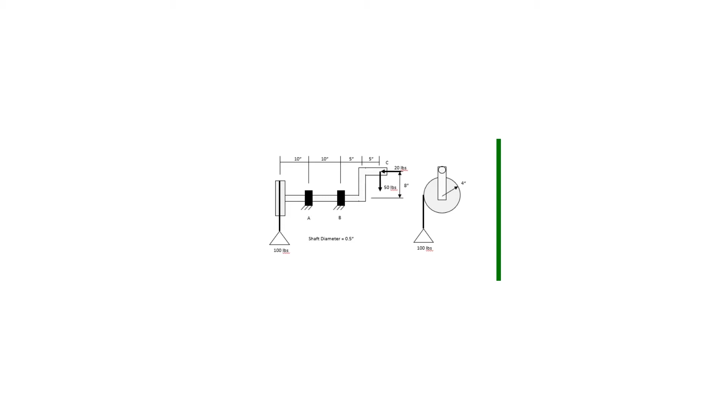Bearings can carry radial loads, and so these bearings will fix the displacement of the shaft in the transverse or radial direction. Bearing B will also carry an axial load. The focus of this model is to determine stresses and deflections in the shaft. We are not concerned with the end disc. Therefore, we can model the hand crank as a single continuous beam as shown.

Here's the handle, the lever arm down to the main crankshaft, and then out to the applied load. This simplifies the geometry because beam elements can be used to model the whole system instead of needing to couple beam and shell elements or beam and solid elements together.

The boundary conditions are also as shown, where this radial bearing will provide zero displacement in the X, Y, and Z directions, as does this radial thrust bearing. The end handle will be fixed in the Z direction to counteract the transverse load that's applied here at the end of the shaft. I hope you enjoy the tutorial.

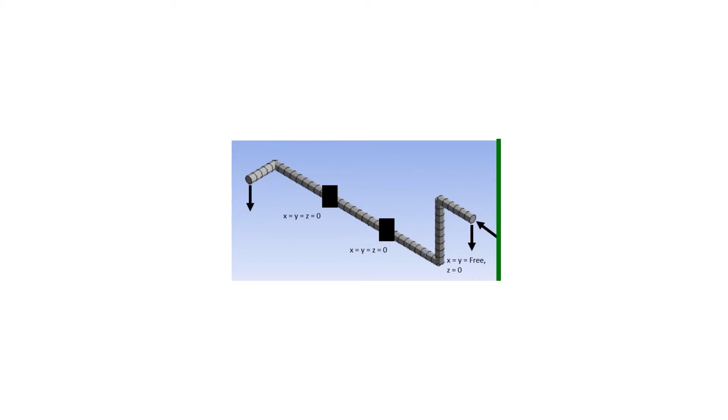After opening SpaceClaim, the first thing I'll do is change the units. The default is metric, and I want to use English units in this model. So I'll left-click File, click SpaceClaim Options, click on Units. I'll leave it as this document only, and I'll change the type from metric to imperial.

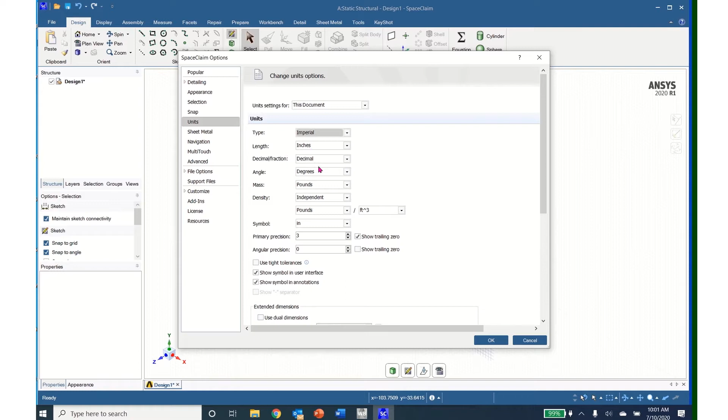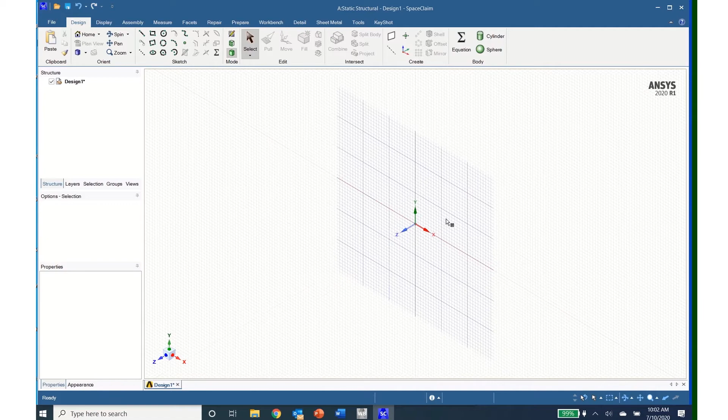Inches is the default. I'll scroll to the bottom and I'll change the minor grid spacing from 1/8 of an inch to 0.1, and the number of grid lines per major I'll change from 8 to 10, and then click OK. I then right click and left click on Select New Sketch Plane and highlight the XY plane and click Plan View. I'm now ready to begin to draw my structure.

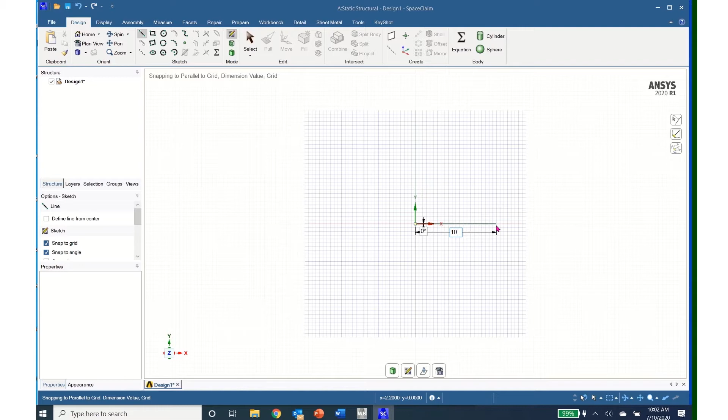I will start at the origin and build the structure to the right. So I'll come up and click on the line tool, click on the origin and release, and move my line over, and this first line will be 10 inches. So enter 10. Then I can, without clicking, move my line over and enter in another 10-inch line. And now I enter in a 5-inch line.

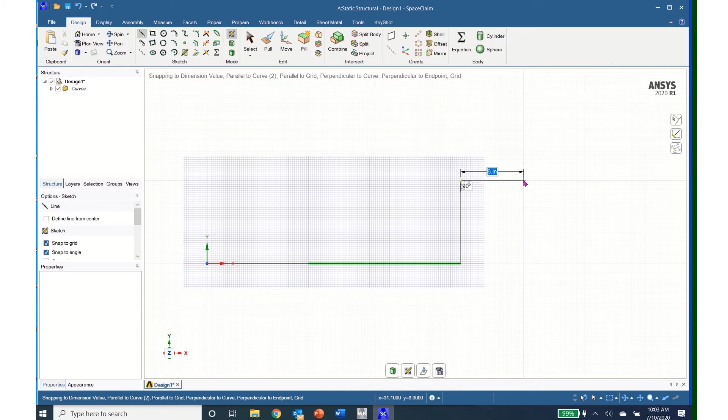And now going in the vertical direction, I will enter in an 8-inch line. And then I can hit my Control key and my middle mouse button and drag my structure over more to the center, release that, move my line over and type in a 5-inch line there. I now have the major part of my shaft designed, and I can now continue by entering in the line for the circular disc.

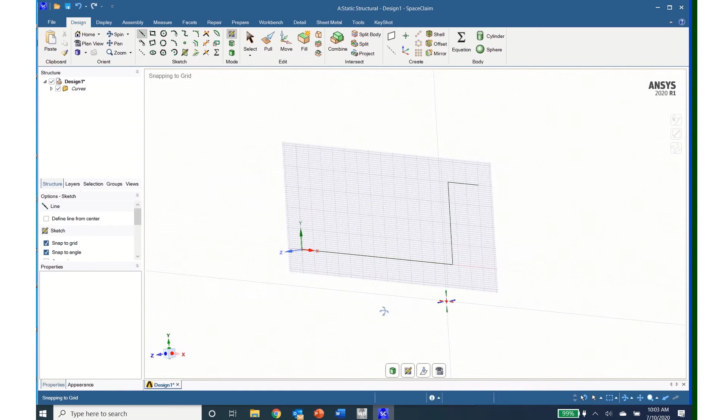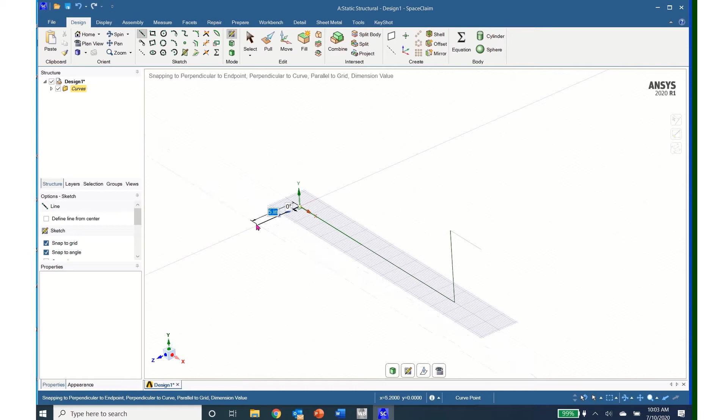So I will middle mouse button and rotate my structure. Now I can right click and select New Sketch Plane, and I'll select the XZ plane as shown. Now I can rotate this and come up to my line tool and click on my line tool, go to my origin again, and I will drag this line out and type in 4 inches.

I am now ready to create my cross sections, so I can escape out of this by clicking twice on escape. Then I come up to prepare, then profiles, click on my circular profile, and I can see that it has generated beam profiles over here. I open that tree, come over to circle and right click on circle, then left click edit beam profile.

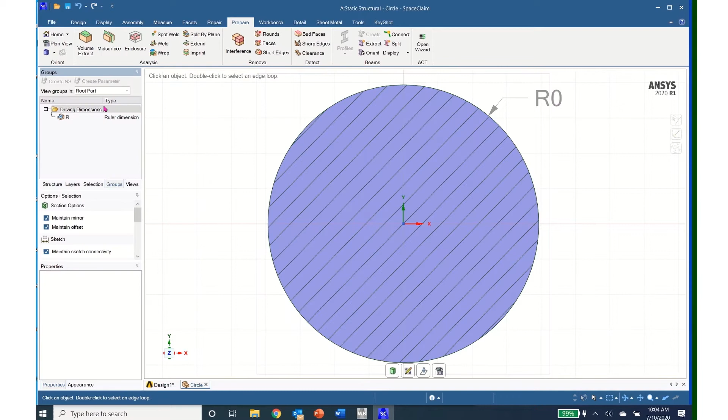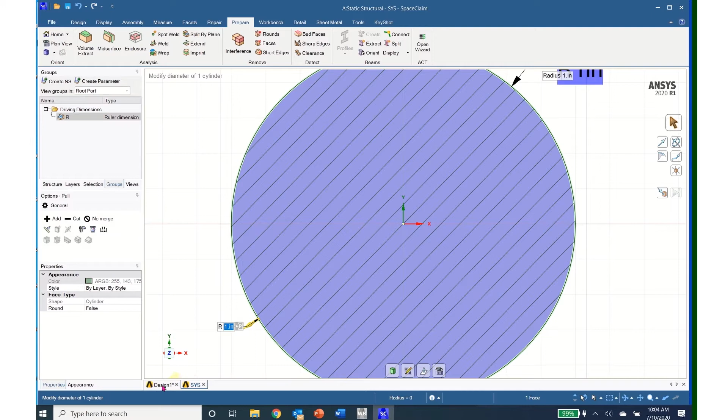Then I click on ruler dimension, and I can click on the 0 and type in 0.5 inches, which is the radius of the shaft. So I'll type in 0.5, enter. Now I come down and I click on the Design 1 tab on the bottom to take me back to my beams, and I click on the structure tree.

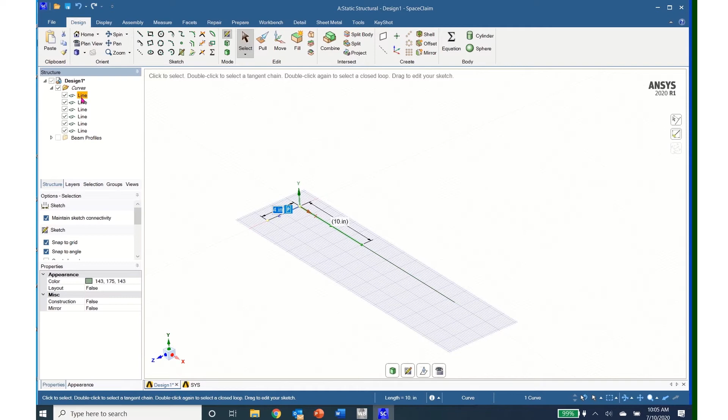Then I come up to curves and I click on design, and then I come over to select and I click on the top line, shift click the bottom line, then I come back to prepare and then click on create, and I have now created those beams, and the lines have changed to beams. I can come over here to display and click the drop down and click on solid beams, and I can see the solid beams, and I can rotate that around.

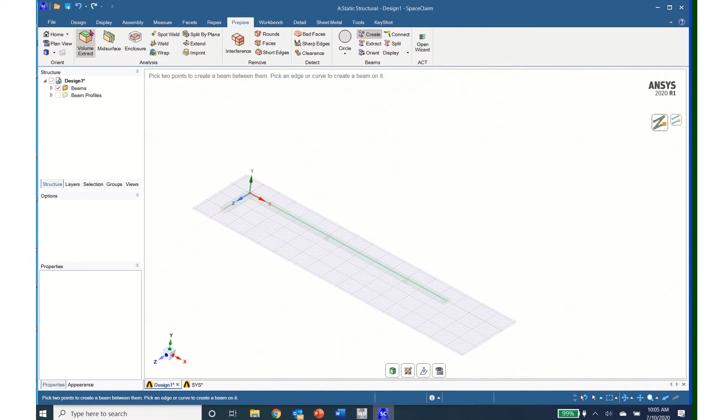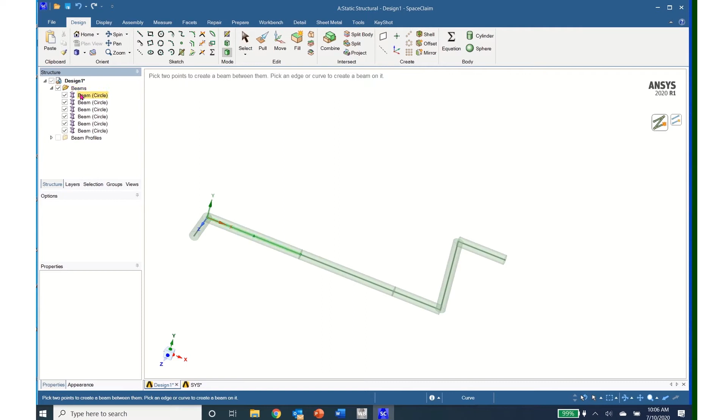If I want to see the full solid structure, I click on design and then 3D mode, and I can see all of my beams and their connections. I now need to tell ANSYS Mechanical that these beams will be connected to each other. To do that, I come up to beams and I will click on the first beam, and to do this I will need to first click on select.

So then I hit select, I'll click on the first beam and then shift click the bottom beam, right click, and then I'll click on move to new component. I can type a new component name in. I'll type in beam, enter. Then I click on that component and I come down to the properties and I change the share topology from none to merge, and that will merge all of these beams together.

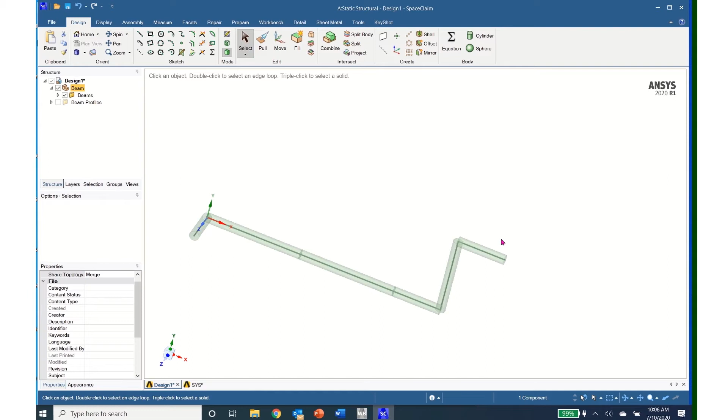I've now created my structure in SpaceClaim. I'm ready to minimize this window and open ANSYS Mechanical. After opening Mechanical, it's a little bit hard to see your structure sometimes. So what I'll do is come over to the structure tree and open up geometry and click on the geometry, and it turns color and makes it easier to see. I can see that my geometry has been brought in as one beam with a circular cross section.

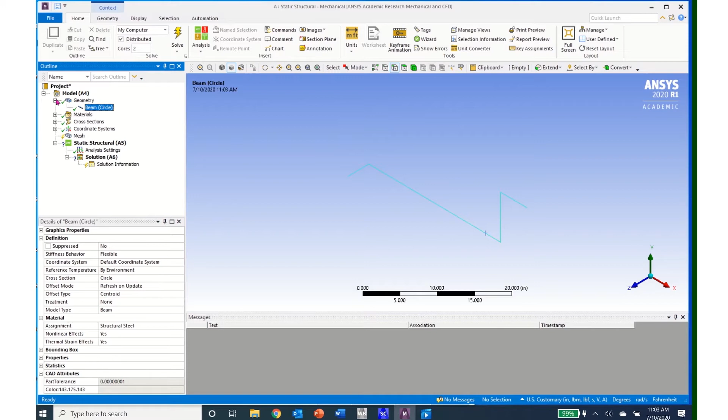If I forget, sometimes this will help remind me about the units, because I can see here that my units are given in terms of meters. So I'll come up to the toolbar, click on units, and change the units from metric to US customary in inches. And now I have changed my units. I can close my geometry, and I can see that I have green checks by my materials, my cross sections, and my coordinate systems. So I'm ready to go ahead and mesh my structure.

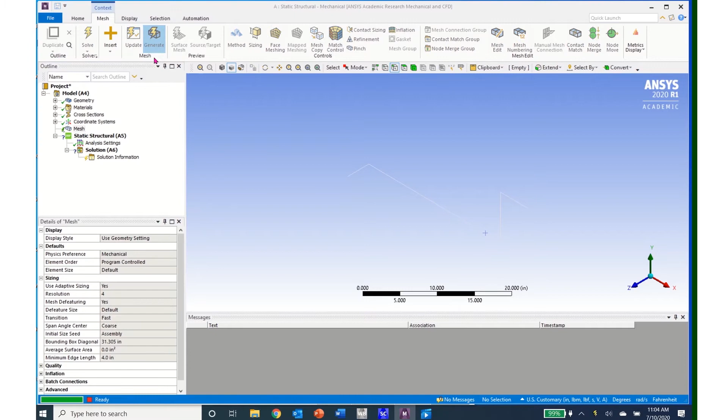So I'll click on mesh, and then I'll click on mesh context and click generate. And I can see that my mesh has been generated. If I want to change the mesh resolution, I can come down here to sizing in the details of my mesh and change the resolution. The default is 2. I already have it set on 4, so I'll go ahead and leave this as my mesh.

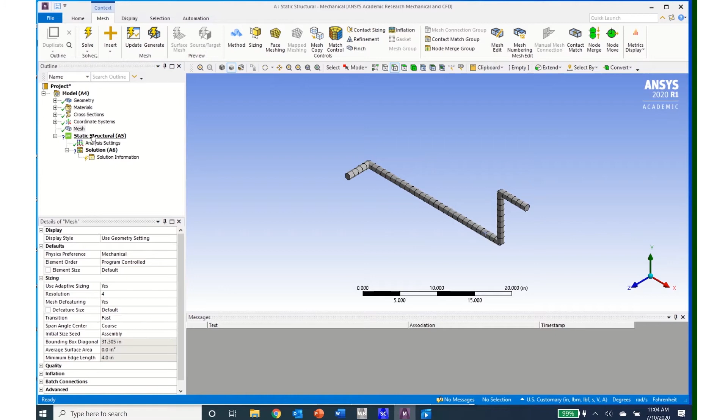I'm now ready to apply my boundary conditions, so I'll come to static structural, click on that, and then I will click on displacement to enter in my first displacement boundary condition. And I will click on the vertex selector and scroll along my structure until my vertices are highlighted. And there's my first vertex, which represents bearing A.

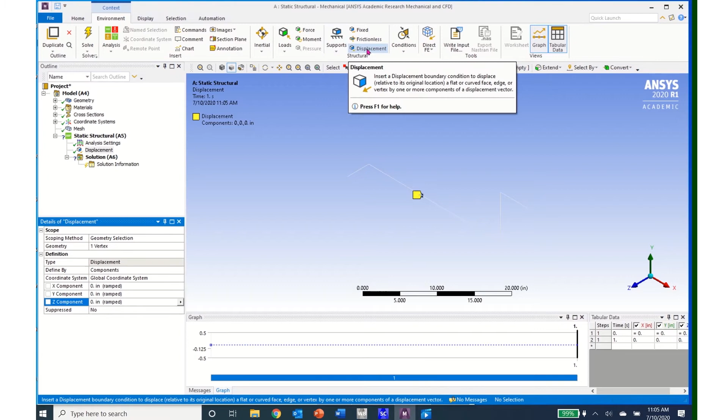So I'll click on that, come over and click Apply, and then I'll enter in the boundary conditions of 0 displacements in all directions at this boundary. So 0, enter, 0, enter, and 0, enter. My next boundary condition will be another displacement boundary, so I'll click on displacement.

This is displacement number 2. I'll select the vertex at bearing B and click on it, and I'll click Apply. And then I will also put in the 0 boundary condition for each of the directions in the X, Y, and Z planes.

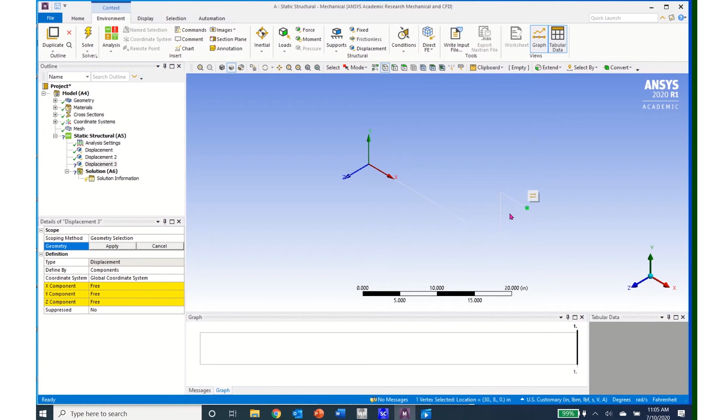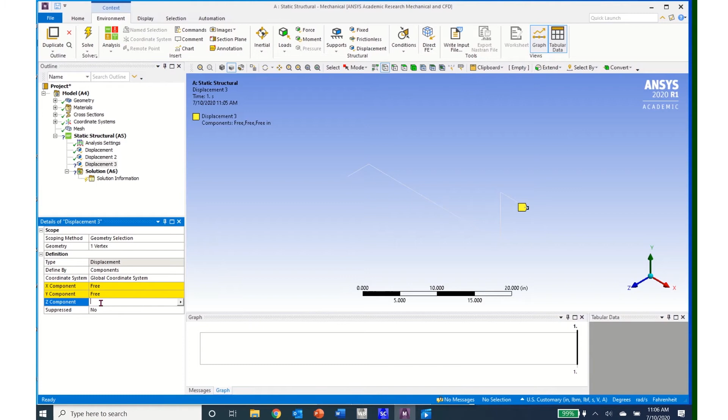I have one more displacement boundary condition that I will apply. It's up at the handle, so I will click on the displacement boundary condition, come over and select the handle vertex, come over and click Apply, and this I will only fix in the Z direction. And this Z direction boundary condition is to resist the vertical load out here on the end of the beam that is causing this whole system to twist. So a Z boundary condition here will let me determine the reaction load that will hold the system in equilibrium. So I'll click a 0 for the Z boundary condition and then click Enter.

Since it might get a little bit confusing, I can come up and change the names of these boundary conditions. So I'll click on the first one, displacement, and then when I click the F2 button on my keyboard, it will let me change the name, and I can type in bearing A. Then I can click on displacement 2. This represents bearing B, so I'll click the F2 button on my keyboard and type in bearing B. My displacement 3 boundary condition was my handle, so I'll click on displacement 3, click the F2 button on my keyboard and type in handle. I've now named those boundary conditions, and it makes it a little bit easier to review them.

I now need to apply my loads, so I will come up to loads and click on loads, and I can see that I can apply all of these different loads, but I'm simply going to apply a force, so I'll click on the force button, come to my vertex out on the end of my simulated disk and click it, then click Apply, and then I'll change the defined by from vector to defined by components, and I'll enter in a -100 for the load. When I click Enter, I can see that I have -100 pounds force. This is a good way to check to make sure that you also are in the right units.

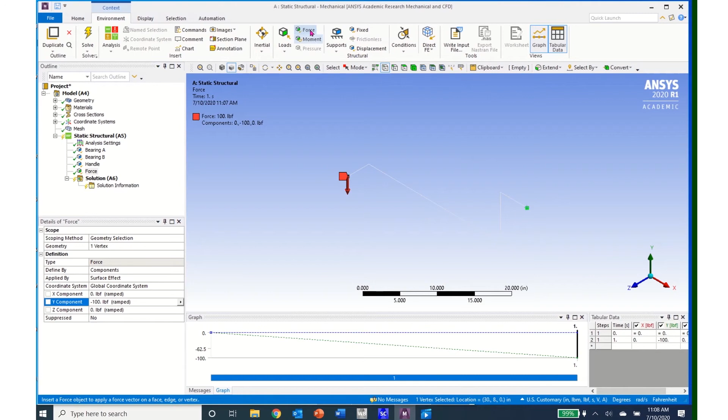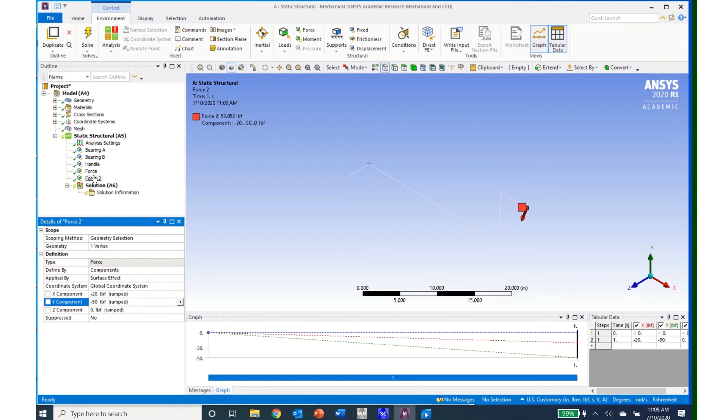I can now come over and apply the handle forces. So I'll click on the handle vertex, come up and click on force. Then I'll come over and click on apply for the geometry. I'll click the vector to change it to components. And here I will enter in a -20 in the X, and a -50 in the Y, and a 0 in the Z. And so I now have that force there. And I can come and change the names of those forces if I want to as well.

I can now scroll through and check my boundary conditions at bearing A. I have this vertex fixed. The components are 0, 0, 0. Bearing B, I have the displacement component 0, 0, and 0. And then up here at the handle, I have a 0 in the Z direction and free in X and Y.

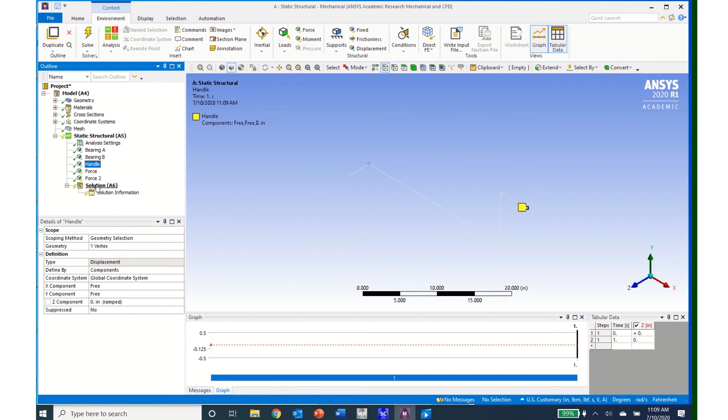I'm now ready to select the outputs, so I'll click on Solution, and if I come up to the stresses and click the drop down for the stresses, I see that everything is grayed out, and that's because I only have beam elements in my model. So I need to come over and enter in a beam tool, and I do that by clicking the drop down on the toolbox. After inserting the beam tool, I can come over to the project tree and open up the beam tool and see that the direct stress and the minimum and maximum combined stresses are computed by default.

To compute the reaction loads, I need to enter in a probe. So I come up to the solution, right-click, insert, and scroll down to probe, and then scroll down to force reaction. And it's asking me over here for the boundary condition where I want that force reaction, and I'll type in bearing A.

I'll do the same thing by coming up to solution, right-clicking, insert, probe, force reaction, and now I'll enter in bearing B. And then one more for the handle, so right-click on solution, insert, scroll down to probe, scroll down to force reaction, and enter in the handle. I now have the force reactions at the two bearings and at the handle.

I can come up and click on the first force reaction, click F2 on my keyboard and type in bearing A, click force reaction 2, click F2 on my keyboard and type in bearing B, and then click force reaction 3, F2 on my keyboard, and handle. So I now have those named.

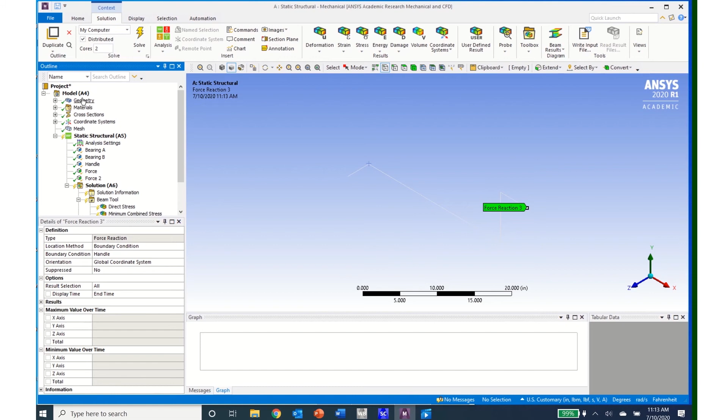I now want to look at putting in a shear moment diagram. To create a shear moment diagram, I first have to create a path along which the shear moment diagram will be created or computed. To do that, I come up to Model, and I right-click on Model and Insert, and then Construction Geometry and Path. Then I come down to Path, and I change the path type from 2 points to edge.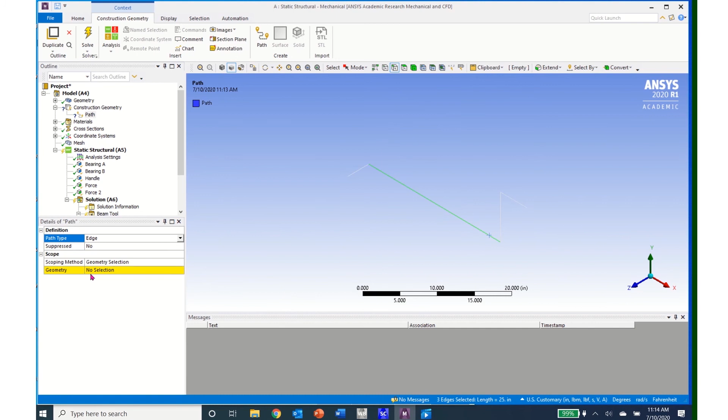And then I come and pick the lines that I want to be in my shear moment diagram. So I'll click on the Edge Select tool, I'll click the first line, Control-click the second line, and Control-click the third line, come over to No Selection, and click Apply. And I now have the 3 edges along which my shear moment diagram will be computed.

I now come down to Solution again. I right-click on Solution, Insert, and I come down to Beam Results, and I come down to Shear Moment Diagram. And now it's asking for a path. I left the name of the path up above, so I just need to click on the yellow box, click the drop down, and select Path.

And then I want to come down, and right now it's giving me the total shear moment diagram. I want to click on that box and look at the YZ component, so I'll click on that component.

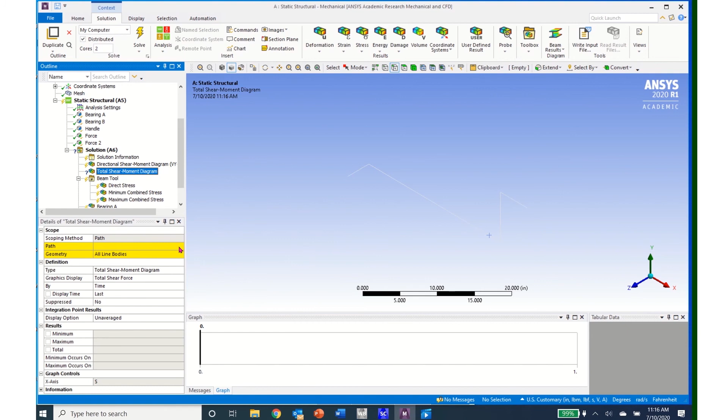Then I need to do the same thing, so I'll right-click on Solution again, Insert, and come down to Beam Results and Shear Moment Diagram. I'll click on the Path window to enter in the path, and then I'll click on the shear moment diagram to be in the Z-plane. So I now have my 2 shear moment diagrams about the 2 planes.

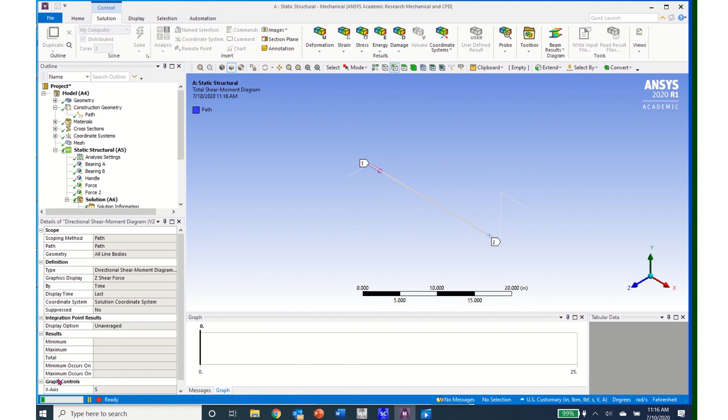I have a beam tool with the direct and maximum and minimum combined stresses, and I have my reaction loads at bearing A, bearing B, and on the handle. So I'm ready to go ahead and do a solve. So clicking on Solve, my solution is generated, and I can see that it's processing down here.

My cursor was left on the shear moment diagram, so immediately after the solve, my first shear moment diagram opens up. Here's my shear, and I can see I come along with 0 shear, and then I jump up to my maximum of 50, drop down and come across. I can see the associated moment diagram, and it actually gives me the displacement as well. I can look at my other shear moment diagram and correlate that to my hand calculations.

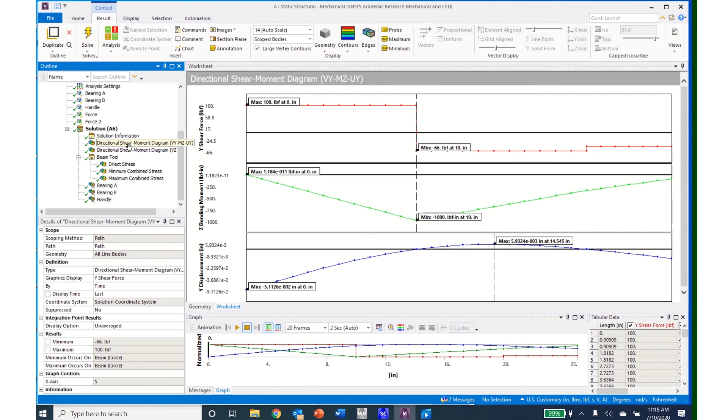I can come down and look at my reaction forces at bearing A, and I can see that my reaction forces are 0 in the X, Y is 166, and minus 50 in the Z, and those compare to my hand calculations as well.

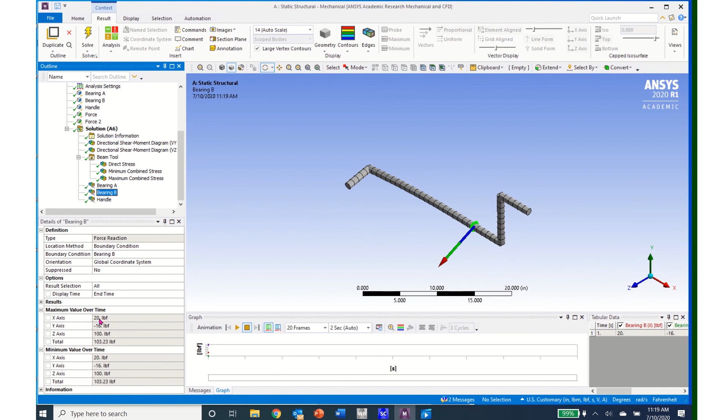In this model, we changed bearing A and bearing B, and we had them both as radial thrust bearings. And so if I look at bearing B, the axial load carried in the x direction of the 20 pounds is carried at that boundary, and I can see that there.

I can look at my stress results, and I can see my maximum combined or my minimum combined stresses where they occur, and I can see my maximum combined stresses occur here at the bending that happens around bearing A, which also correlates to my hand calculations.